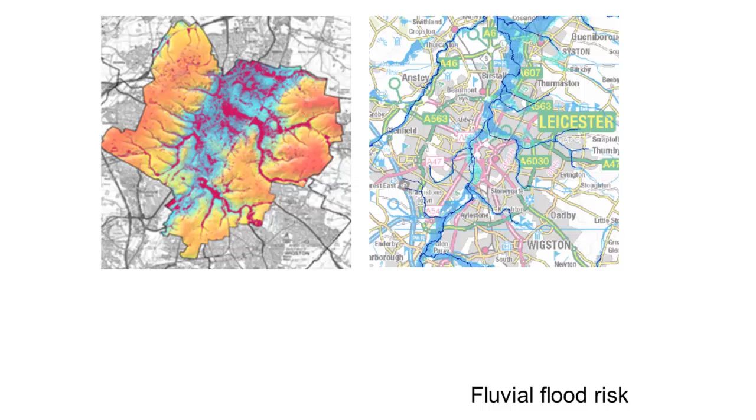I gave a presentation to councillors once trying to explain why we've got to try and manage our floodwaters in the city. I said, if we don't manage our floodwaters in the city, Loughborough gets it. And one of the councillors said, that's a problem? But it is a problem. We've got to try and look at where the water's coming from and try to manage it locally.

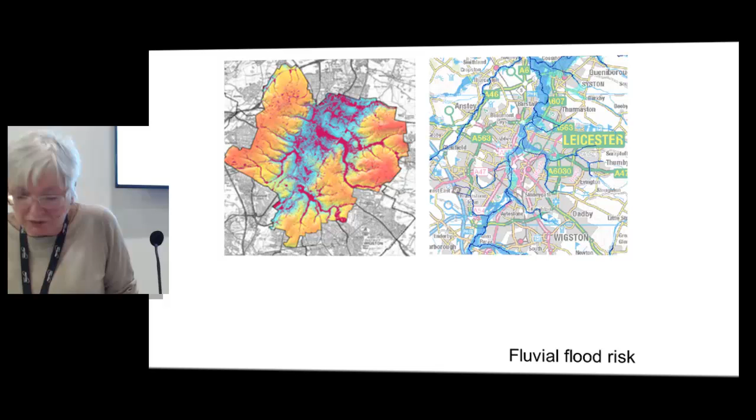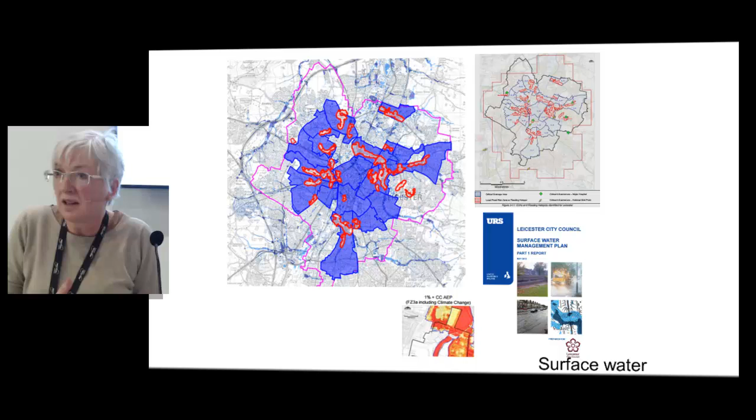So we've had a surface water management plan in existence for quite a while. And what that has revealed is you tend to think that the obvious flooding areas are near the river, but actually a lot of these blue areas that are called our critical drainage areas are on higher land. Flooding from surface water can take place because there are obstacles to the flows of water, so you end up with water backing up and creating problems in really unexpected areas.

Now, we've built this into our planning policy, so when people apply for planning, this is one of the critical factors in looking at how strict we should be on making sure they put good localised infrastructure in.

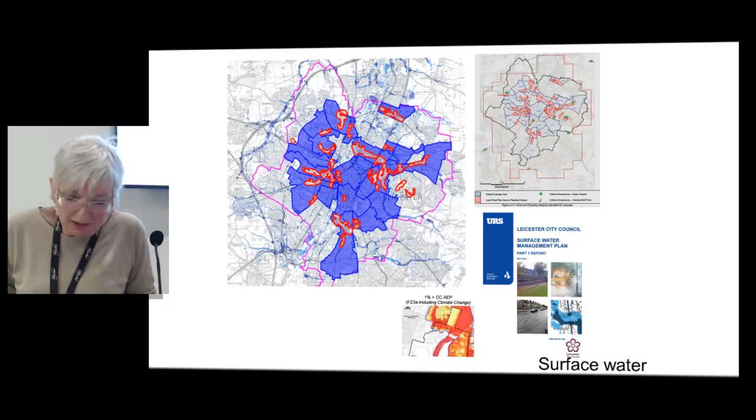We're also lucky in Leicester for having a housing scheme that's one of the oldest to have had SUDs within it. It's called Hamilton. It features in Ciria guidance. It was first envisaged to have a Swales system way back in 1992. The first houses started getting built in about 2000, and it's good for us to be able to go back and see and do peer review and understand how it works, what works well, and how it could be done better.

So we've got a system of 4 swale corridors. Some of them are very good, some of them aren't so good, but they take the water down to a series of wetlands at the bottom of the site before it eventually reaches the brook systems that then threaten the urban areas. So what we're trying to do is slow that water, hold it in these areas so that in times of peak rain events, we're not rushing all our water to the most vulnerable areas.

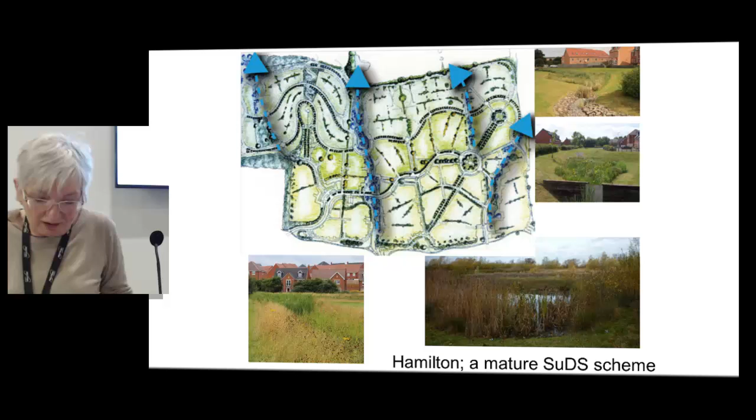So that's Hamilton. This is where I get angry. We shouldn't be doing this. This is so wrong. This is a former allotment site. It's on a slope like that. We've got impermeable soils. This is the open space. That's wrong. There's no way that's right. So we've got to use some common sense and not build in problems for the future.

The one on the right looks quite pretty, and I'm sure you could do an estate agent's photo to sell those houses. Do you know where the children play? They play on the road. That can't be right.

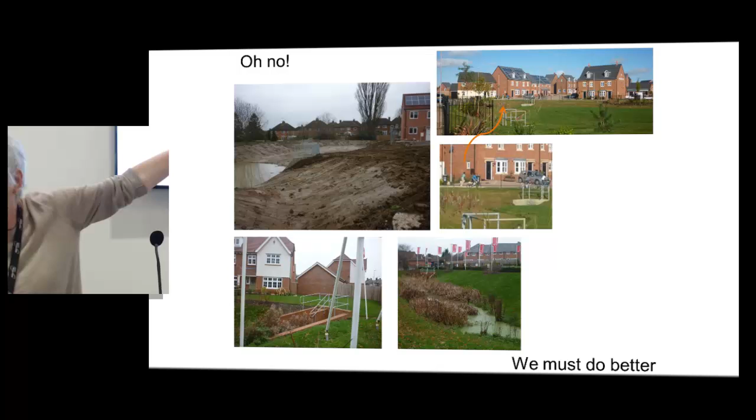This is wrong. This is another scheme. It was a hospital car park, that one. And they were going to do conventional drainage. We got them to drain to Swales, create a wetland. They saved money, we got biodiversity, and now in phase 2 they're extending the principles.

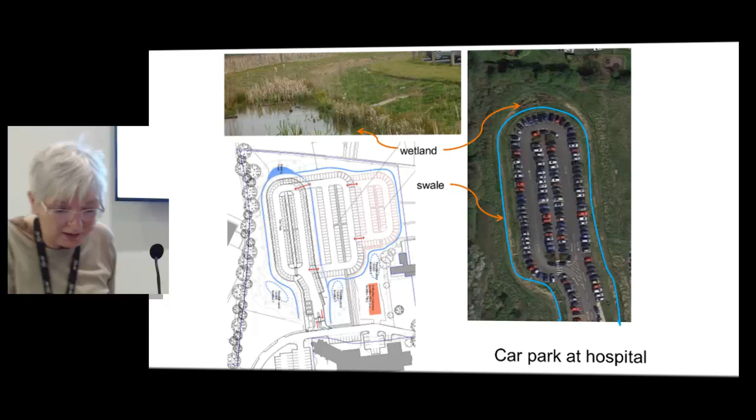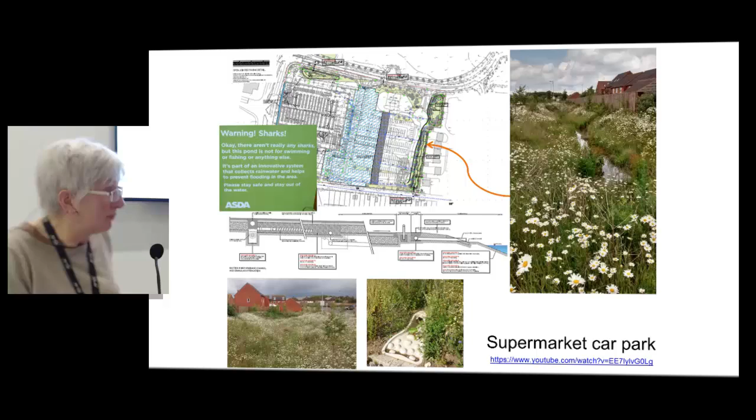This is something I feel really proud about. We have a city centre where you've got fantastically compacted soils, made up ground, all the rest of it. So we're starting to put SUDS in as standard. We've actually done some testing and found that a lot of these made up grounds that people said couldn't possibly support any filtration at all do support a little bit. Every time you can use something like that, it helps lower the dependence on traditional drainage.

So this was our first ever scheme. This is called Applegate. All this is a linear trench, and we use proprietary systems where we could afford them, because I was having to make a case to the council as to why they should spend an extra £17,000 - and they said they would spend an extra £7,000. So we did this as a test to see how it worked.

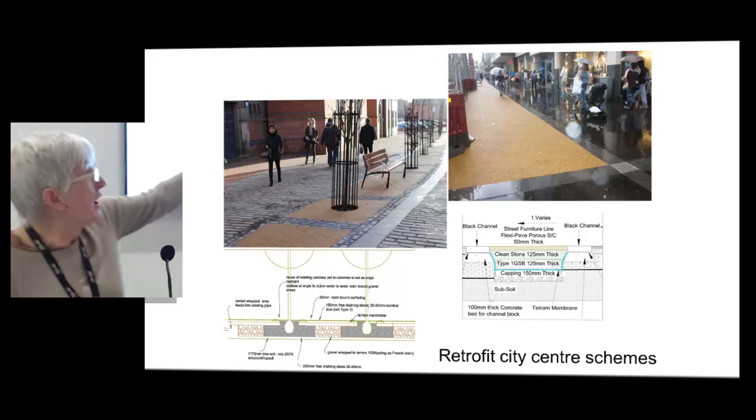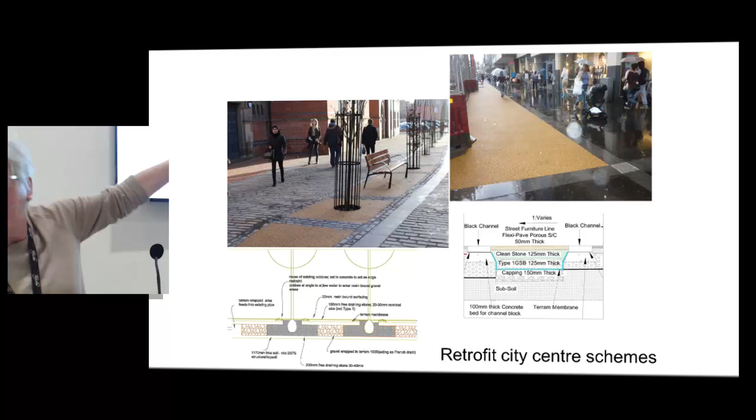So the one on the right I've included, it was still being constructed, but that was August the 8th, a couple of years back, and it was a heavy, heavy downpour. As you can see, where we've got our permeable resin bound, the water goes through. So there are other benefits to permeable paving in that you start to have drier streets.

But we're now, as a council in the city, we're looking to do this sort of thing as the norm. It's nothing strange. We're now doing this as the norm.

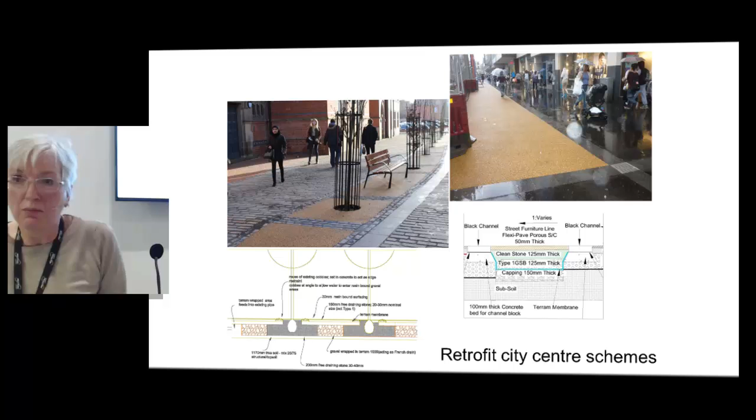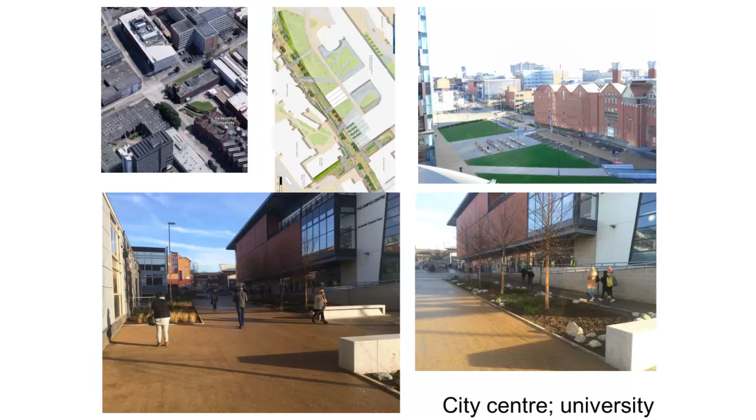This is great, this isn't quite finished yet. This was the main highway through to De Montfort University, which is a city centre university. Now, what's going on with universities at the moment is they're all competing massively to have that edge. And with De Montfort, they didn't really have an edge - it was just a city centre university with a series of buildings that didn't tie together.

So what I did was come up with the initial ideas, took them through consultation, and then it went out to landscape architects. So we've got a green corridor now. We've still got to allow for emergency vehicles in the highway - it's closed off to normal throughway, but we've got to allow for emergency vehicles, cyclists, all the rest of it. So what we've got is a series of interlinked rain gardens right the way through, and it looks absolutely fantastic.

Everybody's liking it, and nobody's realising yet that they've got SUDS. So that's going to be our next challenge, is actually explaining to people what they've actually got. But it's become like a feature of the university - something that is drainage is actually the way they're now promoting the university.

We are looking at, with the Environment Agency, the flow routes through the whole of the city. And what we're doing is we're trying to find opportunities as we go. So this was the first sort of scheme we did. That's theoretically amenity land, but there's a line at the top that had a very steep-sided ditch that took the stormwater off the A6 and rushed it straight into the River Soar. So you had a steep-sided ditch and you had pollution going straight into the river.

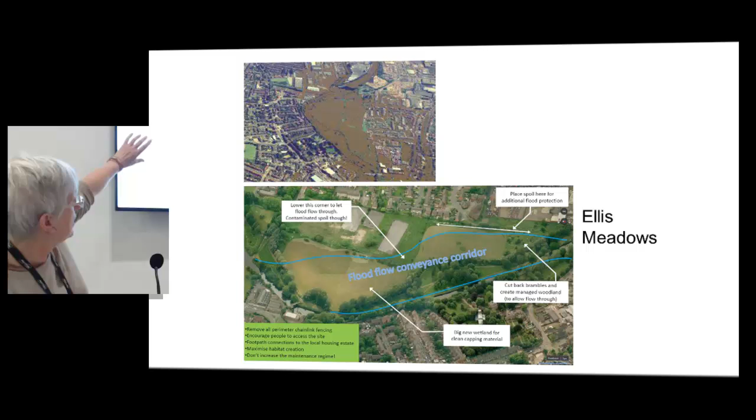So we looked at how the water flows through, and what was happening was that bump there was creating a bottleneck so that all the water backed up into these terraced streets potentially. So we've actually taken away that bump and provided flood attenuation in this area.

Just to stress, this is one of a series of schemes. We've created 10,000 cubic metre storage of water, also built in some cycle paths and tree planting. So what was a fairly sterile, mown grass amenity area that people used mainly for dog walking becomes something really attractive.

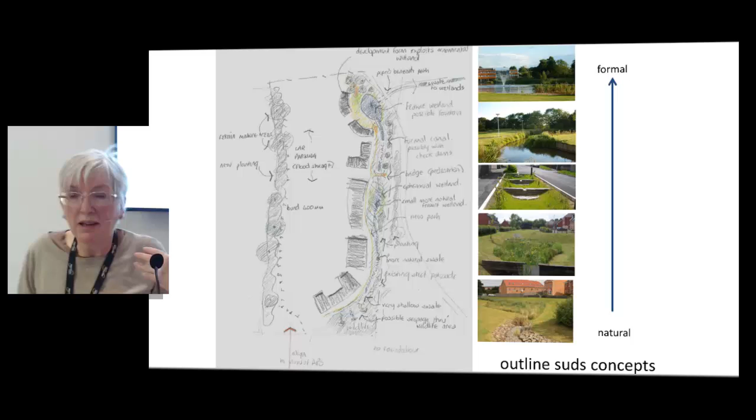Building on the success of that, in the neighbouring development area we're working on trying to encourage innovative use of SUDS, which will suit the sort of development that's going to go there - a research park.

The big thing we're working on at the moment, in this idea of spreading the knowledge, is working out the barriers to developers doing better SUDS. If developers don't think they're going to get SUDS adopted, why should they waste time and money trying to do them? So what we're working on in the city is a technical adoptions guide for SUDS.

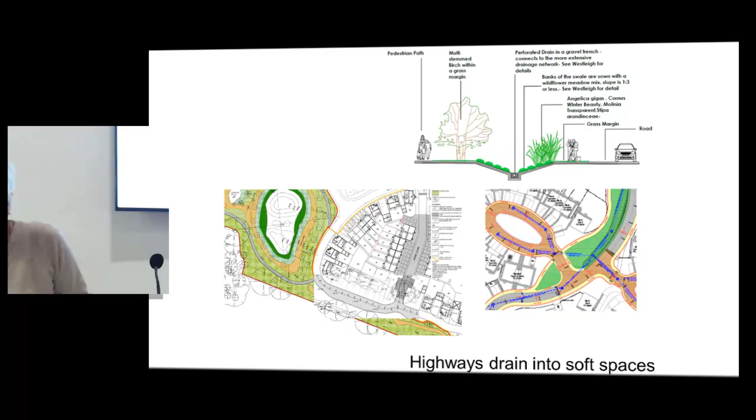We've got this idea of water flowing into soft areas, then being picked up by ephemeral wetland type features, and then going into pipe systems. We found out that Severn Trent wouldn't adopt it, so the county-wide SUDS group went to Coventry to meet Severn Trent and explained what we were trying to do. Now we've got Severn Trent on board, and this is adopted.

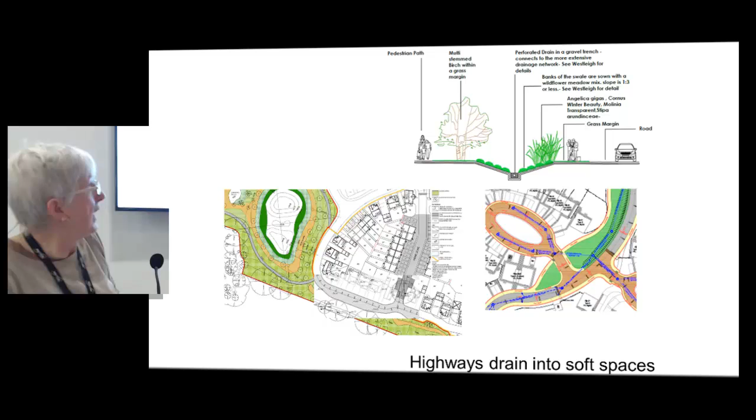So there's our principle, but here's our first example of carriageways actually draining into soft areas. Not built yet, but it's got planning - I talked about that one over there before. You can see the underdrain swale to the side of it.

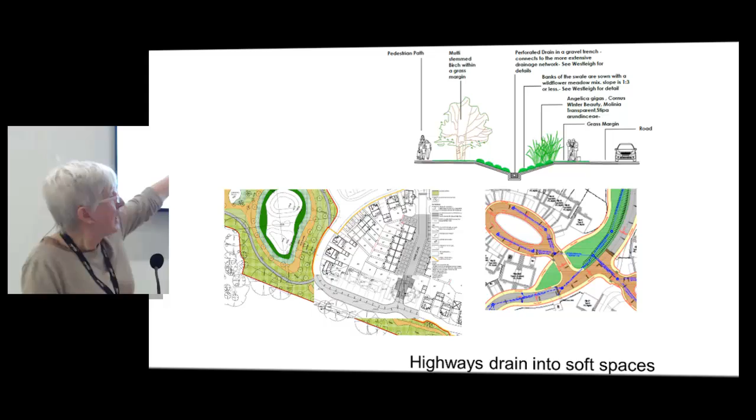This is our big scheme. Again, we've got a wetland, and we were going to end up with some huge pipe going in, a huge head wall and a concrete apron. This isn't what we want to see with wetlands.

We want natural spaces that people want to spend time at. We don't want to create areas where if a child falls, they crack their head open. So we talked to Severn Trent, and we're breaking it up into a whole series of smaller pipes with at-grade outfalls, so we've got something that looks reasonably natural.

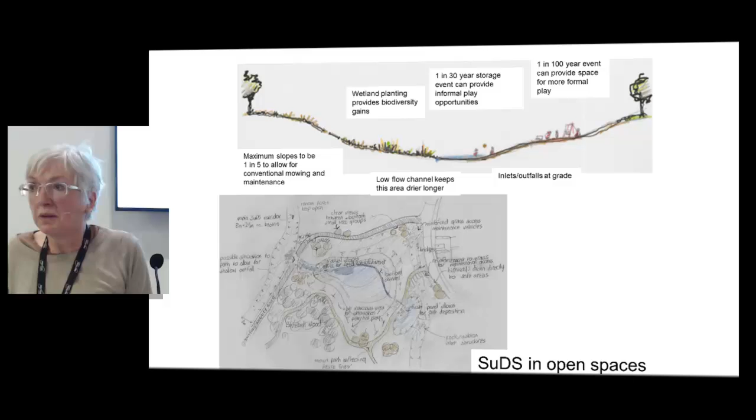We've worked with our parks people because we're going to have to use our soft land to form storage for water, and we're going to have to talk to the people who are going to maintain them. So the top there shows our principles, what we will adopt if they come in with that sort of thing, and below is an example of one of the pond systems that's going to be adopted.

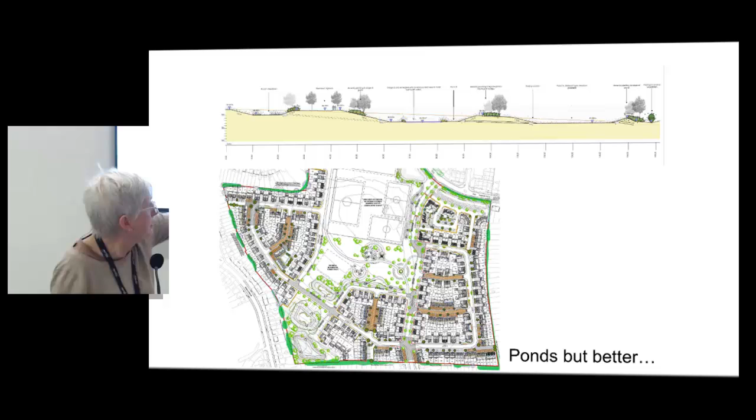Here's another innovative one. We've got a whole series of water holding areas - this one very temporary that can be used for informal play, this one stronger on biodiversity, and that one for real water holding. We've also got some rain gardens through the housing as well. So we're starting to get there.